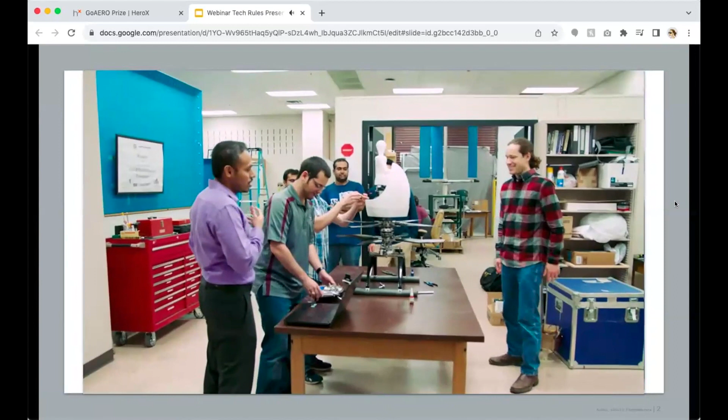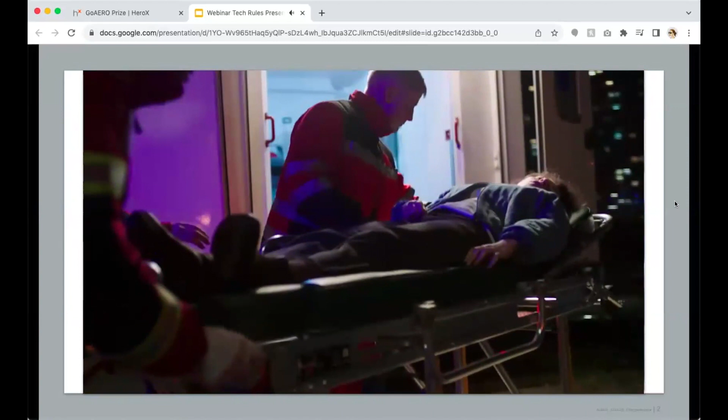See heroes every day. Heroes who look past danger to help people in need. Heroes who step in to be the difference between triumph and tragedy. And heroes who use their minds to create technology that saves lives. We need those heroes. We're launching a new prize competition for a singular mission, saving lives. More than $2 million in total prizes is on the line for the best thinkers, creators, and inventors to stretch and challenge their minds, to change the way we reach people in the face of disaster, unlocking a new era of rescue response, an era that unleashes the power of autonomy, speed, and precision. Alongside NASA and Pratt & Whitney, GoAERO is looking for the brightest, boldest, and bravest innovators to change the way we rescue and respond to disaster. This is your chance to make history and save lives. Join us. Ready, set, GoAERO.

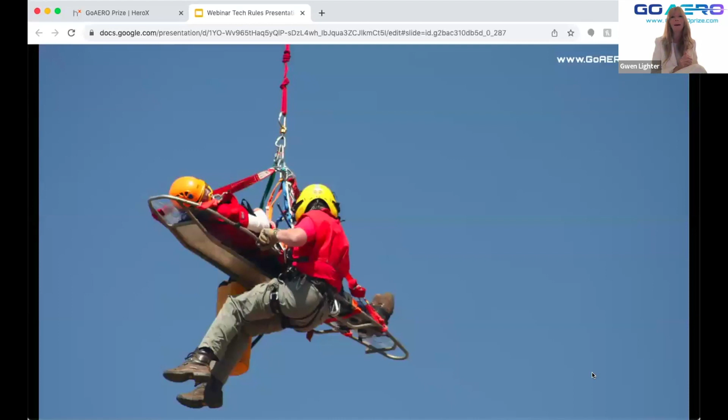Our technical rules were informed by hundreds of interviews with aviation experts, first responders as well, and of course our organizational partners, which include both aviation organizations and first responder organizations. We would like these flyers to have real world applicability. Once again, I cannot stress enough, we are on a mission to save lives, and these flyers are all about doing good. And so without further ado, I'd like to welcome my colleague, Sky Sartorius, to dive into the technical rules with you all.

Morning. Yeah, so the goal of this webinar is really to help participants understand the rules and answer the questions. I'm glad that we're going to be doing 2 of these because we don't yet know where the Q&A is going to go. So this is going to inform where we might focus the next one, but these will both be recorded. We're not going to talk about why the rules are the way they are or anything like this. It's really just to go through the details, give as much time as possible for you guys to ask questions and get into those nitty-gritty details, the information that you need in order to start designing and developing things to compete in this competition.

So I'm just going to go through a brief overview of the missions, what you're going to be asked to do at the fly-off. There's a bit of an assumption that most of the audience today has read through the rule book, so we will be dedicating most of this to Q&A, but I will go through a big overview of the missions first. So the 5 missions are productivity, adversity, maneuvering, precision, and adaptation. Kind of like a pentathlon, there's a way to gather points in each of these, but you can also just win each of these missions outright. The event looks like all the participants gathering together, attempting and flying all 5 of those missions over the course of a long weekend. Next slide.

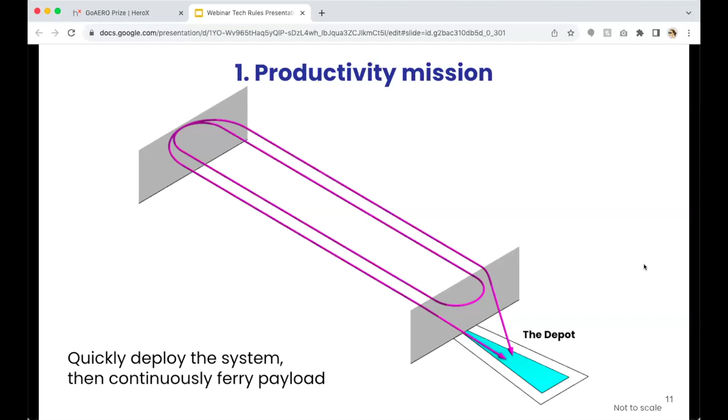Next chart. The adversity mission is really testing being able to operate in difficult conditions, and this is one of the most important and also one of the most unique things about the GoAERO competition. So it's just about taking off and landing in difficult conditions. There are 5 operation zones, or OZs, listed here. You start and end at the base, which is just like a normal flat piece of ground, like a hard surface.

But from there, you need to go to one of the other 4 listed here, and you take off. You have to overfly a certain central marker. The marker's there to give us flexibility in laying out the course, because again, we don't know the venue yet. There's the pit, which is basically loose, dry sand, where it's kind of a 12-foot by 12-foot zone where you have to touch down. Right?

These are all the boundaries that are just kind of ground contact points. So it's dry sand, and then it's a larger patch of sand than just 12 feet by 12 feet. And then beyond that, you know, could be 20 or 30 feet away, there's kind of little walls to contain the sand, but those little walls are designed to not interfere with the aircraft, just to try to contain the sand.

There's a hill that's a high traction surface at a 12-degree incline, and again, the hill itself is going to be a lot bigger than 11 by 11 feet, so that when you're on it, you still have to account for the extension of the plane that hill is on, in both directions, uphill and downhill. The flood is knee-deep water with moderate simulated rainfall.

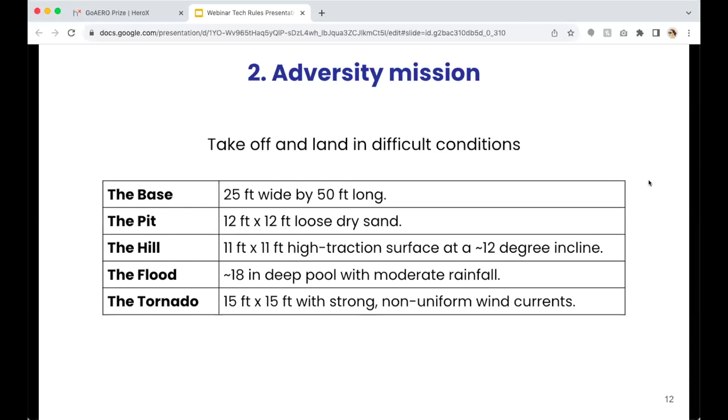Okay, so the maneuvering mission, the slalom course, is an obstacle course. You start at the base and you start with the ALEX payload on board. You go around this course, around the pylons, so these obstacles, it's TBD how they're going to be built, but you need to avoid them. It is not illegal to contact the obstacles per se, but if you damage them to the point that they're not usable again as obstacles, then that's disqualifying.

So you land at the spot. In this case, the timer pauses during the payload changes. So once you land at the spot, the timer pauses for up to a few minutes. You can unload the payload, and then the payload handlers leave, and then you can take off again.

The timer restarts. You go run this backwards, empty a payload, touch down at the base, and run it forwards again empty. Then your last landing at the spot, you go in again with your payload handlers, reload that payload, again, timer pause, and run it in reverse. And that final touchdown at the base, that's when your timer stops. And again, this is a race against the clock. Next one, please.

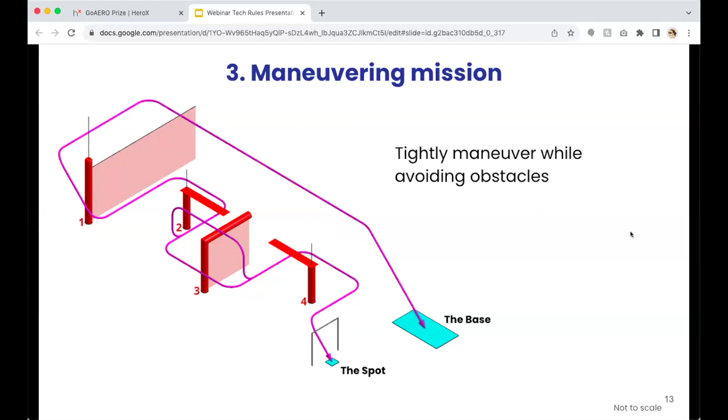The precision mission, so this is kind of testing your fine motor skills. You start at, so that OZ on the right is kind of like the base. The OZ is a hard surface. But in addition to that, there are 4 spots that you just have to touch somewhere in there sometime during the mission. But you start and land at that area. You can choose at the beginning, in the middle, or the end to do those touches. But then sometime during the course of your mission, you need to do the other tests in order.

And then the toss is like a 6-foot diameter aperture in a wall. And in this case, the wall is, we'll do our best to make it physical, where touching it is allowed. But again, the robustness and structural integrity of that wall is not guaranteed. So you have to toss a soft 10-pound beanbag through there. And then it has to be gently lobbed enough so that it falls through a 6-foot diameter hoop on the other side.

The push is like a plunger. So it's a 5-inch diameter plunger that you have to depress somewhere between 1 and 6 inches. And you have to hold it there for a total of 20 seconds. Those 20 seconds don't have to be continuous, by the way. One thing I should have mentioned on the adversity mission is that when you're touched down for 2 minutes in those OZs, those do have to be contiguous minutes.

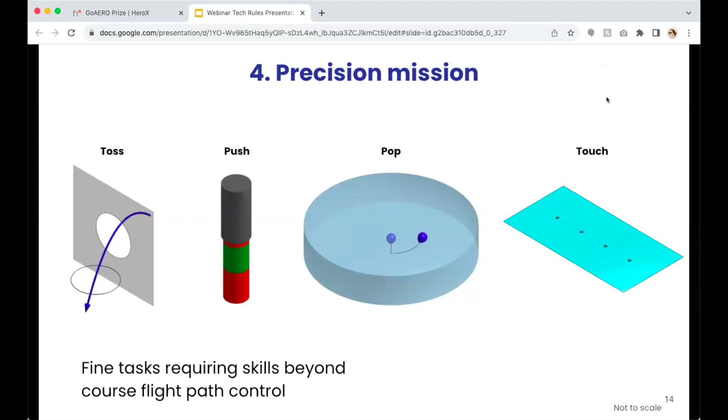The balloon pop is just a couple of balloons in a pool. They're tethered to the middle. One's below the surface. One is loosely tethered, contained within a certain radius, and you have to pop both of those. And then I mentioned the touch before. So you do all 4 of those tasks, and once all 4 tasks are done and you've landed back at the starting point, then that's when you're done and the timer stops. All right, let's go to the last one.

Great. The adaptation mission. So this one visually looks complicated, but basically you see there's just an array of up to 20 ground markers that are roughly in a grid. And you start again at the base, which is a hard flat surface. And right at the starting point, that's when these markers are set to a certain state. And the state can be green, red, or amber. And what that state is determines what you have to do. So red, simplest, don't overfly it with any part of the vehicle at all. Otherwise, that marker is violated.

And then green, you need to overfly it, and usually one designated point on your vehicle needs to overfly within a 10-foot diameter cylinder above that, but below 35 feet. And then similarly for amber, same thing, but above 50 feet. And so your task is to say, okay, what is the state of this array? What's the best way to fly through it? What's the optimal flight path? And then actually executing that flight path.

And at the end, you have to cross the finish line. The finish line is just a plane. You have to fully go across that plane and then back across it again. So it's not just speed across it, flying through. You need to go through, stop quickly, then reverse through it before your timer stops. And then that's when the timer stops, but then you still have to go back and land back where you started. Right, that's all for the mission explanation. So go to the next chart.

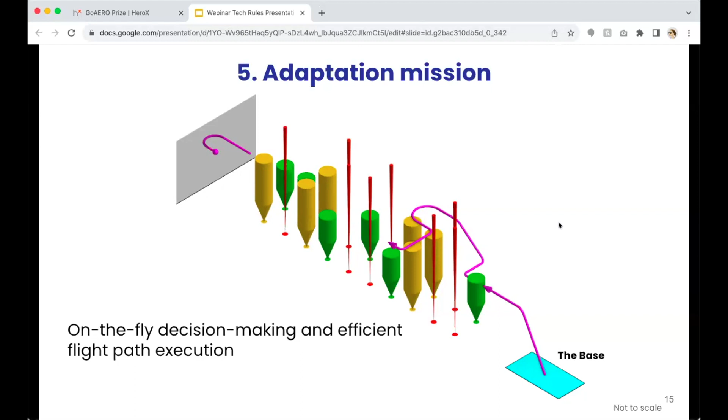Next chart. Yeah, so this is kind of a summary that's nice to have up there. I'll let you read that for a moment, but I'm going to switch to screen sharing in just a moment to guide you to the best place to follow along for the rest of this.

So, cool. Where's my share button? Oh, host disabled participant screen sharing. Oh no.

Are you able to fix it? There you go. Try again.

That should do it. All right, so if you want to follow along today, this is the GoAERO website, herox.com/GoAERO. When we're talking about the rules, what I do is I just go here, I do a quick find for rule book, and the second hit down here, that's where you can get a link to the rule book.

So this is the document that, if I were building a team to do the GoAERO competition and I had a bunch of talented engineers and they said, hey, what are we going to build, this is the document I would hand them to say, okay, these are the requirements we need to build to for the thing that needs to show up at the fly off and perform. There's some stuff up here about the points, so I'll talk about that first.

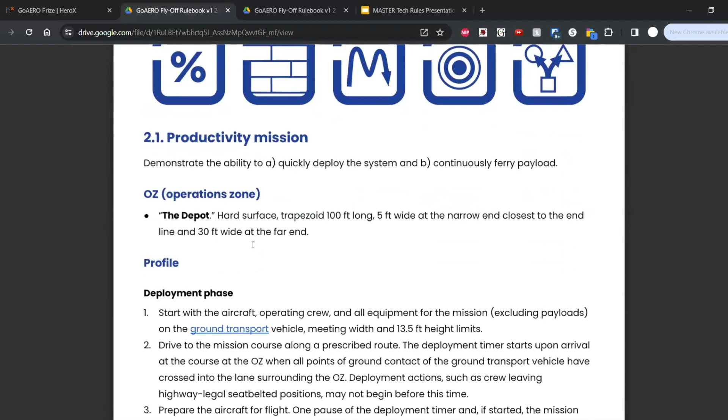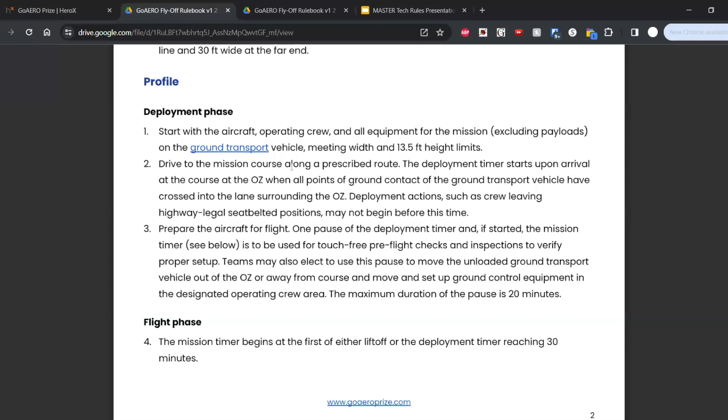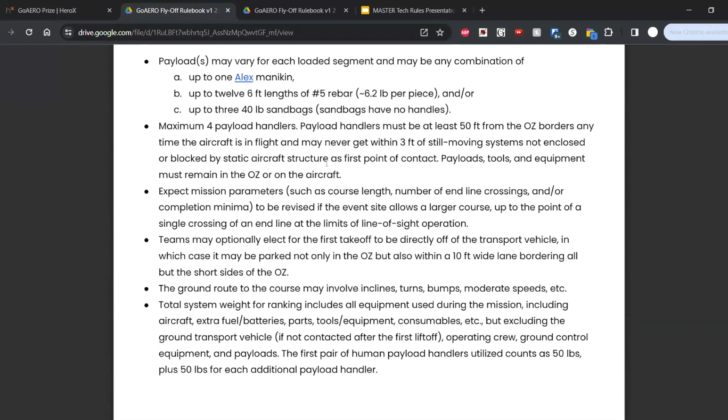There's a summary of the definition of the operation zones where you have to take off and land at the top. Then there's a mission profile that says, in order, this is what you have to do. In this case, the mission is split into 2 parts. Below that, there's a bulleted list of extra information covering all the little nuances, edge cases, and additional information you need.

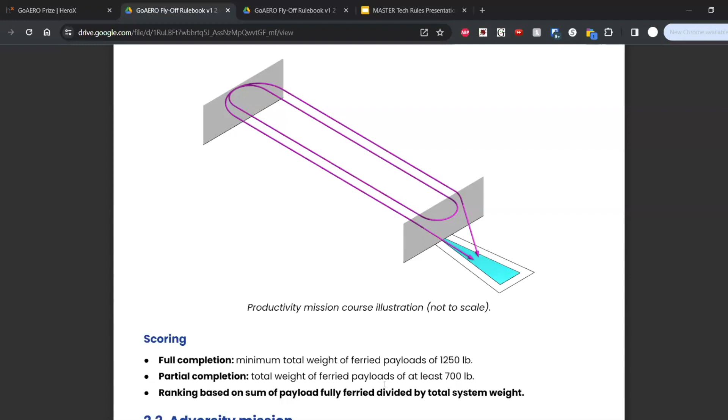At the bottom of each mission, there are images if needed, and then the scoring. This is where you'll find your partial completion criteria. In this case, partial completion is just not moving as much weight. Then it talks about what determines the winner. So that's how each of the missions is laid out, and I talked through all of these.

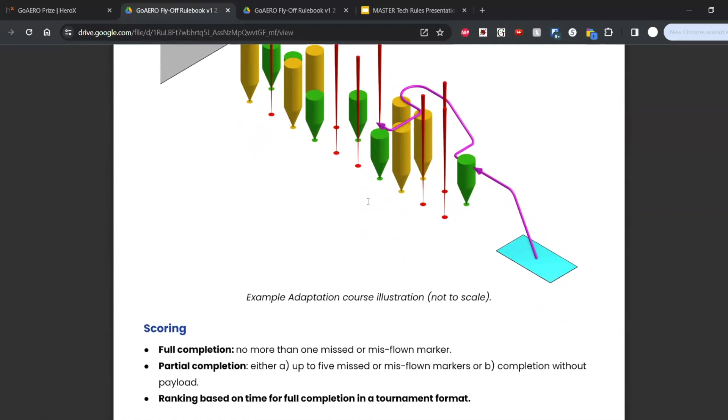One thing to point out is that because not every configuration of this randomized array is going to be the same for everybody, this may end up being a tournament format where the final winners are determined by going head to head on identical arrays side by side at the same time. Then there's a whole bunch of additional rules and information about the spirit of the competition, and more information on the Alex mannequin.

Yeah, so this term is highly Googleable. That's where you can find the specific model of the mannequin that we'll be using. But for your own development and testing, you don't need to purchase the full thing. You can just get a department store mannequin and ballast it if you like. And there will be a webinar with that mannequin vendor, so you can get a good idea of how much mobility the joints have and things like that, so you know how to design your vehicle around it.

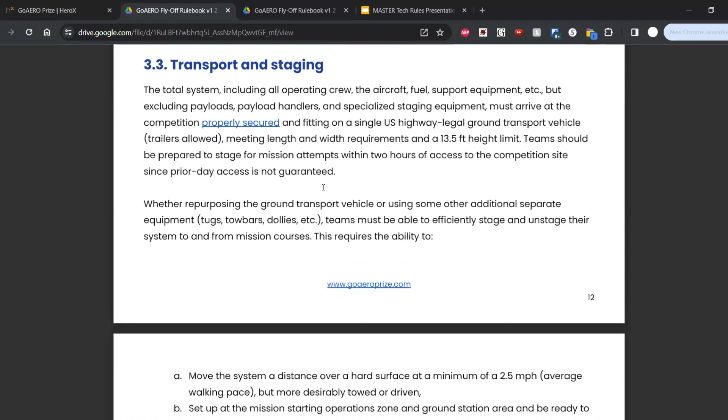More information about transport and staging. So in addition to the highway vehicle, when you're on site at the competition, you need to be able to get around, right? You need to be able to taxi the vehicle or put it on a dolly and get it around, because you need to do that to facilitate the logistics of running the competition. And there are penalties for not being able to do that.

Penalties are basically in the form of points lost. So any penalty means that you don't get full credit for the mission. If you have any penalties whatsoever for a mission, then you can't win that mission. Single penalties are going out of bounds of an OZ, so if one wheel touches inside and one wheel touches outside. And double penalties are other illegal contact of anything outside of the OZ, other than the explicitly allowed mission elements that we talked about.

And then, like I said, not being able to meet those staging and unstaging requirements, like being able to taxi around efficiently. And then if you damage things, the payloads. And then there's also total disqualification for really gross violations of rules, unsportsmanlike conduct, anything unsafe, or a range excursion or something like that.

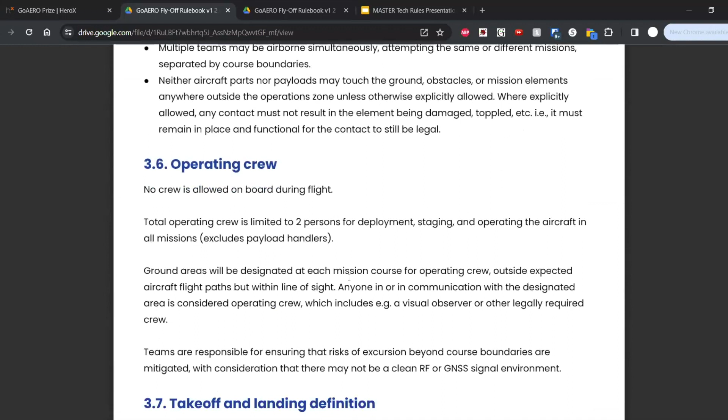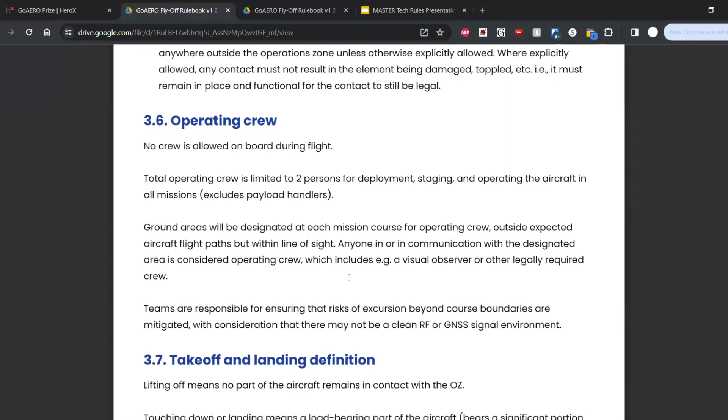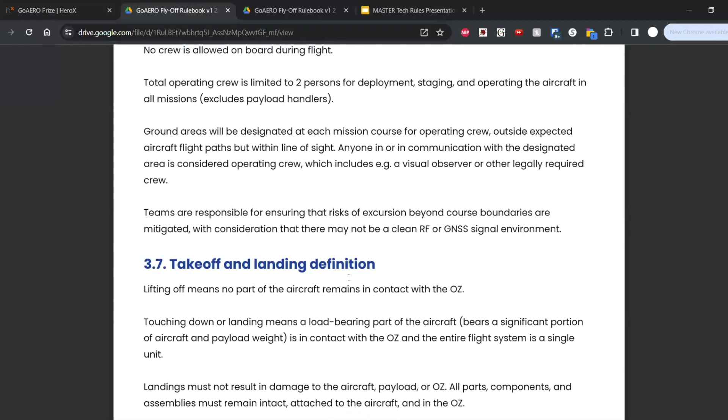I think the other important thing is, in case that wasn't clear, these are all uncrewed vehicles. The only human-like thing on board will be that mannequin. And the total operating crew is limited to 2 people. That includes getting the system ready from that highway legal vehicle, and also operating the aircraft. To be clear, that operating crew doesn't include the payload handlers you need in the productivity and maneuvering missions to get the payloads on and off, and also payload handlers to help get the payload on before other missions, if need be.

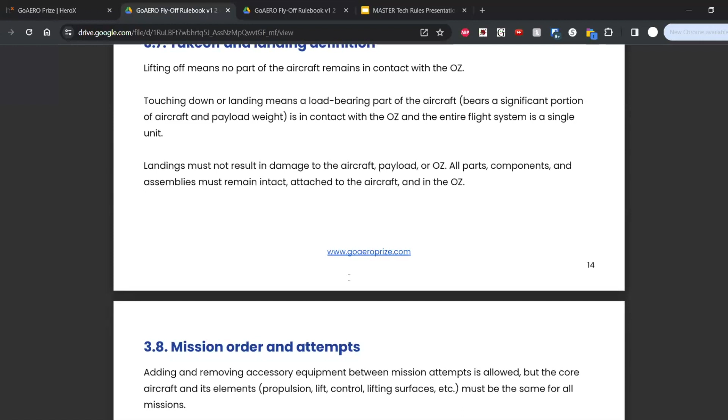So, takeoff and landing definition. What does actually landing mean? That means touching down with a load bearing part of the aircraft. And then some more on mission order and attempts. It's safest to assume that you will get at most 1 attempt at each mission. And that's it for rules.

If you want to take back the screen share and go back to that summary chart, I think that would be a good artifact to have up for Q&A. Sure. So actually, I think I have it here. Yeah, okay, we can have that there. Great. Thanks so much, Sky. It looks like we've got several questions in queue, so we'll just start at the top.

Are there any vehicle size limits? No, there are no vehicle size limits explicitly. The closest thing to an explicit limit is being able to fit it in a disassembled or folded up state on that highway legal vehicle. And on the maneuvering mission, you have that gate you have to fit through that's 28 feet wide to access that spot OZ. So vehicles that are about that size or bigger and can't maneuver really precisely and are at risk of hitting that gate won't be able to attempt that mission.

And in addition to that, there are other missions like the adaptation mission, where the spacing of that grid means there are definite advantages to having a smaller aircraft, but it's not an explicit must be small.

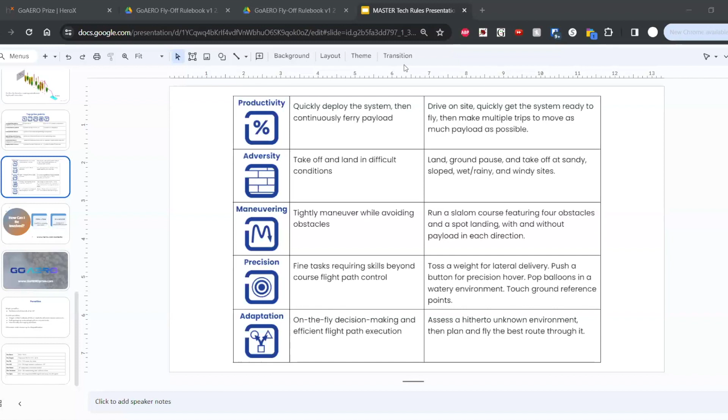Can we change aircraft geometry for different missions? So that's addressed in the rules directly, but I can't change tabs because, so it's in here at the very bottom. This is how it's defined. It's not the super hard criterion. So if you're keeping the core elements of propulsion, lift, control, and lifting surfaces, but somehow the vehicle's changing size, then that could be acceptable.

There are a couple of questions that we can address directly here about the specific rules and scoring for the first stage. The submission form is now available in full on the herox.com/GoAERO platform. It includes all of the technical reporting requirements and all of the submission requirements for the competition. So you will be able to see all of the pieces of the technical design report and all of the components of the submission that you are required to submit. We will also be posting all of this information on herox.com/GoAERO. So you'll be able to clearly see everything that you need to prepare for this particular stage.

Criteria as well will be added so that you will understand how the judges will be reviewing your submissions as well. If there are any further questions regarding the rules and scoring of the first stage, we would encourage you to use the forum and to post any questions there so that we can address them. So Nidhi, where can they find that stuff on the website? The submission form is, once you're registered for the competition, you'll see a button that says begin entry, and that will take you directly to the submission form. That's right, my login isn't registered for this one. Correct. So that'll be here, right? Correct, yes. The blue button will change to join a team and begin entry.

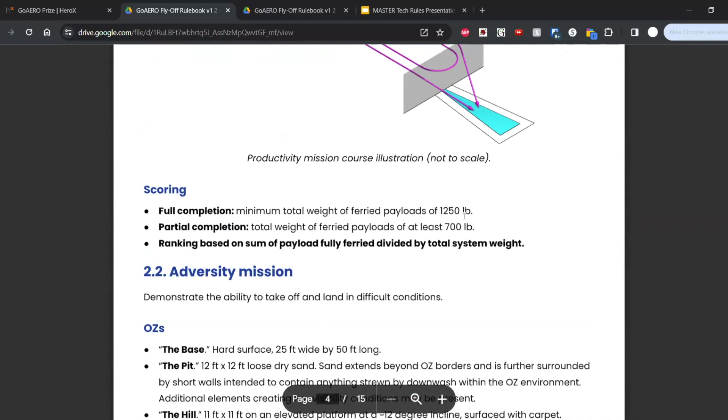Okay, so that's not written in here. Maybe I had an FAQ about it, but it was written one time. They're going to be as strong as we can make them with off-the-shelf wind machines. So we don't know what that is yet. But if we can get up to like 15, 20 knots, that would be great. That's what we're aiming for. Correct. That is what the FAQ says. This will depend on specific wind machines procured, but the objective is to achieve winds up to 20 knots.

And then back to the FAQ. So that's over here. So there's a lot of these things. So in addition to reading the rule book, definitely peruse the FAQ because there are a lot of things for clarification. And a lot of the things have to do with where we weren't able to know for sure how it's going to be yet and write that into the rule book. We're able to put something in the FAQ that gives you an idea of what we're thinking and what we're going to be trying to do. And so the wind machines are a good example of that, of saying, hey, we don't know exactly what it's going to be, but this is what we're going to try for.

Is the 35% scaled model a max or minimum requirement? Minimum. I mean, that should be, yeah, at least. So, at least means that or more.

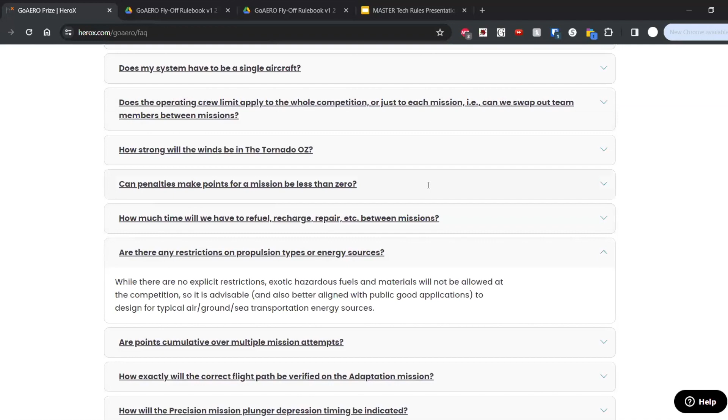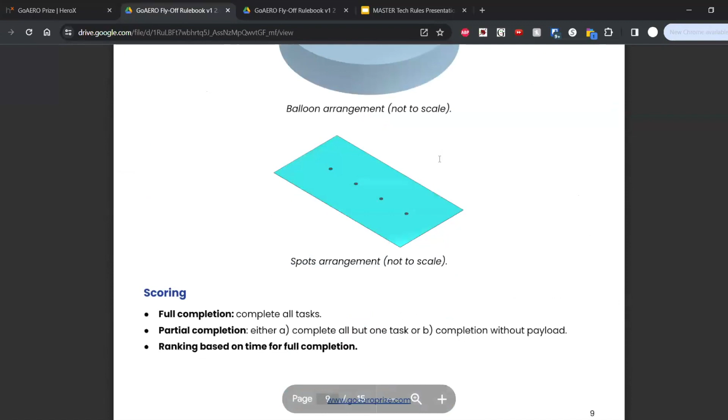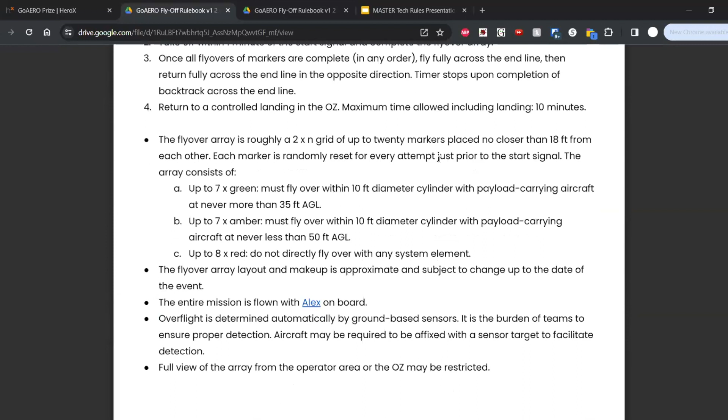Can cargo be carried by a sling load? So yes, but you need to still keep in mind the definitions of takeoff and landing that are in the rules, and that requires the aircraft actually touching down itself. So just hovering and releasing payloads, as the rules are currently written, isn't allowed. And so that's down here.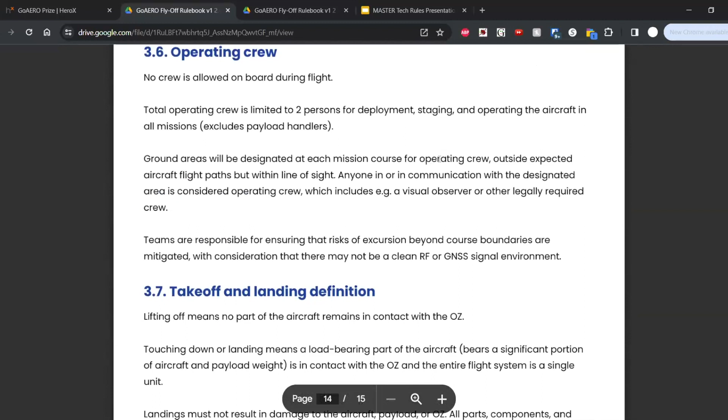So maybe that's where a little bit more discussion. So lifting off, no part of the aircraft remains in contact with the OZ. In this case, that would mean also pieces of payload touching the ground if that's attached to the aircraft. And then a load-bearing part of the aircraft that bears a substantial part of the aircraft and the payload weight is in contact with the OZ.

So while it is possible to, say, have a sling load and have that sling load touch down, you're still not landed until the part of the aircraft, the majority of the aircraft weight, a part of the structure that supports that weight, is touching the ground.

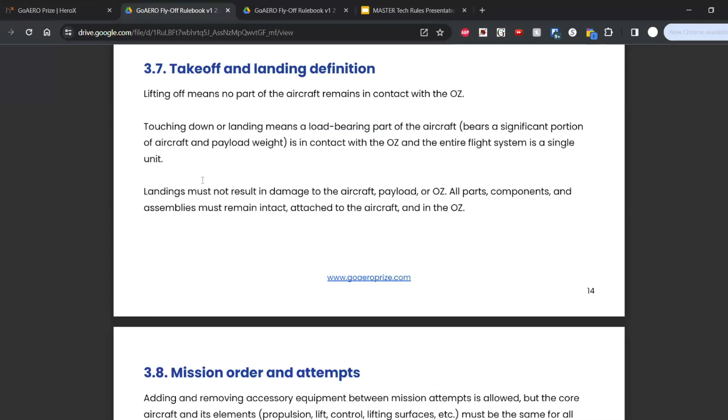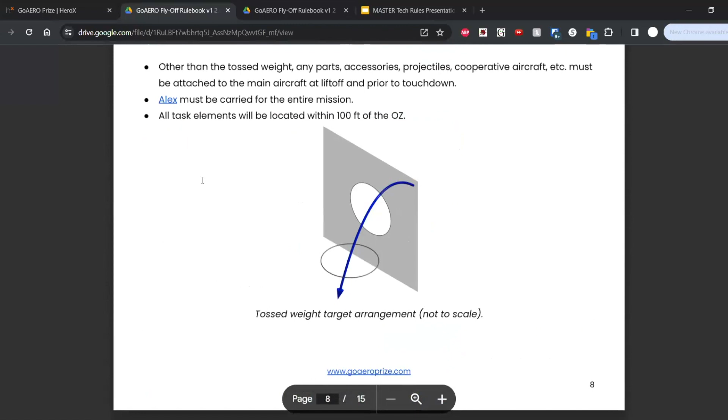Is it permissible to use multiple small drones simultaneously for the missions? Yes. So that scenario was explicitly considered, and for example, for the precision mission, the difficulty there is that you're not done until the whole system is a single unit once again and landed. So if you're doing daughter vehicles, then those need to be able to redock and things like that. So difficult to do, but if that's a path you want to take, then it is something that can be done.

The rules are written such that if you think you can use that to game a mission, so for example, just using a small drone to carry the sensor target on the adaptation mission through the course and then just lumber along with your payload carrying device, that is taken care of, right? That loophole won't work. But there are some edge cases where a daughter vehicle might be advantageous, but it will be very difficult to execute.

With the competition aircraft weighing above 55 pounds, how are we to perform tests before the competition? And how will operations be done during the competition? Special airworthiness per aircraft, COA, any suggestions? So all these vehicles are going to be well above 55 pounds if they are going to qualify. In order to show up at the competition, you need to have demonstrated that the vehicle has flown with the full payload, and the payload by itself is more than 55 pounds. So these aircraft will all be heavy, so they're going to be registered with experimental airworthiness and all that.